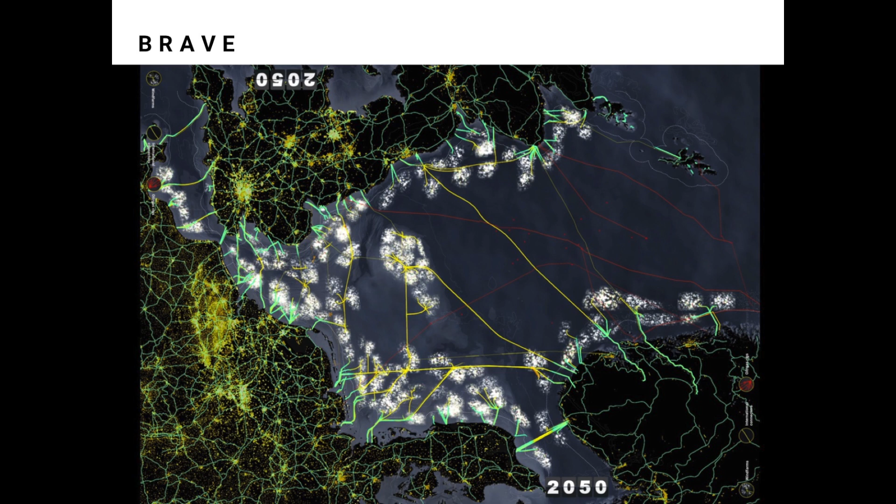The study demonstrates what such an ambitious approach involves, what infrastructure it requires, what it means to link up with the nature of the North Sea, what role the entrepreneurial state plays, which innovations this requires, and especially which new economic dynamic chances this will generate, for instance in the offshore sector.

The project aims to create a new reference point for a broad dialogue between public and private parties and a new appealing step towards realization of large-scale production, transportation and storage of renewable energy on and around the North Sea.

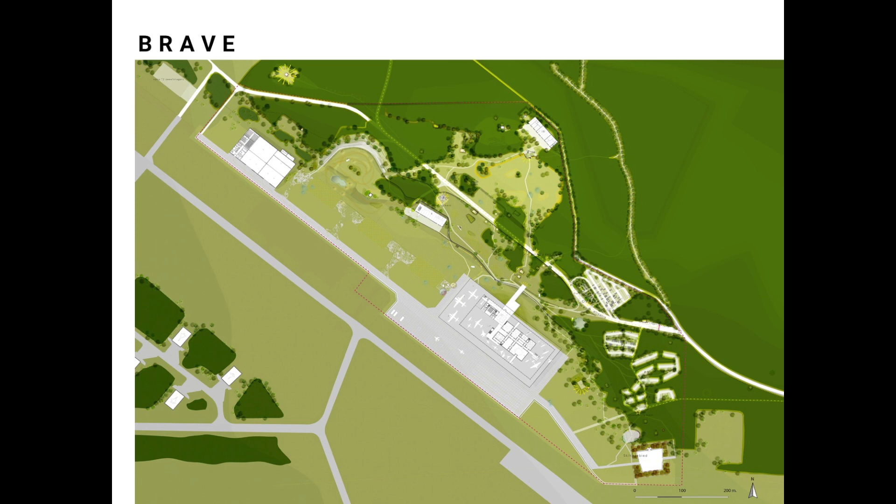This attitude of continuously asking questions, researching, doubting our own logic solution, trying to find an even better, simpler, more appropriate answer, is in our system at H+N+S. It's under our skin. It not only shows in our research activities, but also pops out in concrete design projects. Take, for example, the National Military Museum on the former military airfield of Soesterberg, for which we designed a 45-hectare outside area.

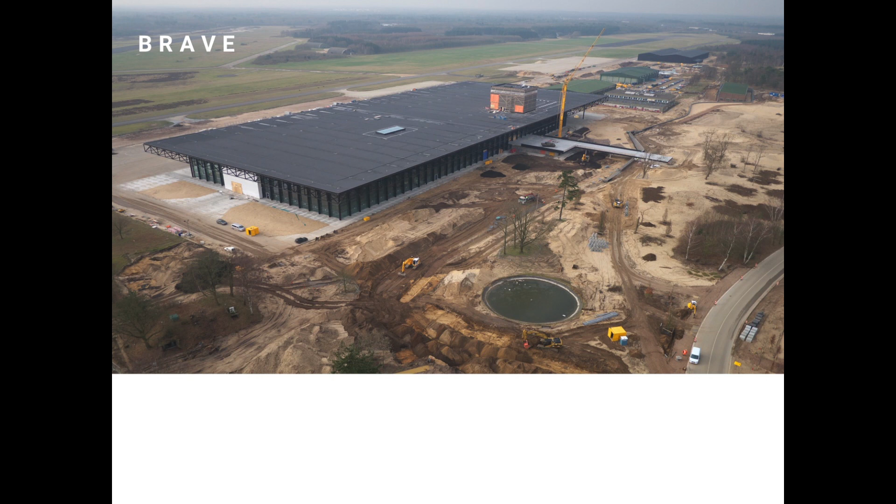In the output specifications, we were asked to build a 2-meter-high fence around the terrain for safety reasons, which makes sense with numerous guns and other military stuff inside this museum. Being situated in the heart of the former airfield, now a nature and recreation area, we strongly hesitated to propose this fence, also because it would have a huge negative impact on the experience of the new museum, a splendid building designed by architect Van Wageningen.

We as designers felt there had to be a better solution, still working as required functionally, but part of the integral design. So, stubborn as we are, or you could say unbelievably positive and naive, we asked the Commissioner if we could organize the same level of security in a different way, which in the end would have to lead to an official change in the tender output specifications.

This asked for thorough research, a wide perspective and close cooperation, an integral way of working, and yes, again, it asked a lot of time. A real integral approach always takes time, convincing everybody concerned of the extra or added value of the alternative, and it requires persistence. The best option is not always the easiest one, but it shows.

In the end, we proposed two alternatives, one on each side of the museum, fitting in the landscape and giving extra meaning to it, telling the story of this historic military landscape and the historic relation between military and the landscape. Looking from the museum inside out, there is not a visible safety measure.

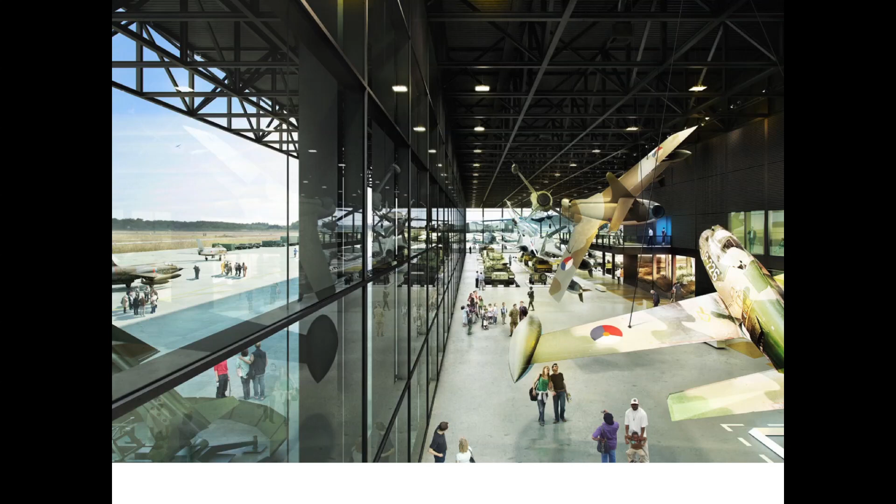On both sides, it blends into the landscape. On the side of the former airfield, we proposed a trench of a few hundred meters, referring to the military trenches we just heard about, which also fits the scale of the surrounding landscape and the scale of the building. Everything here is big. The trench actually works as a ha-ha.

We also heard something about it, a ha-ha in the tradition of the English landscape style. It is actually invisible from the museum. Sorry, I cannot show it. It's invisible, giving the visitor the impression that aircrafts and carriers can still roll to the platforms and airstrip and can take off at any moment. It adds to the magic of the place.

But on the other side of the building, the side of the entrance, we used the topography with some local differences in height—a big difference for the Netherlands, just a few meters—to prevent the necessity of a fence. We gratefully accepted the presence of this difference by concentrating it in one place. We introduced a wall of gabions, filled with reused bricks from this former airbase.

The gabions automatically lead visitors to the museum entrance. They also prevent people from leaving the path in a nature area in development, are a hiding place for birds and other small animals, and add to the story of the military museum.

Because gabions, in Dutch called schanskorven, are literally translated as baskets to hide behind. They actually originate from medieval battlefields as transportable hiding places, and are even visible inside the museum exhibitions. The museum experience, therefore, already starts outside.

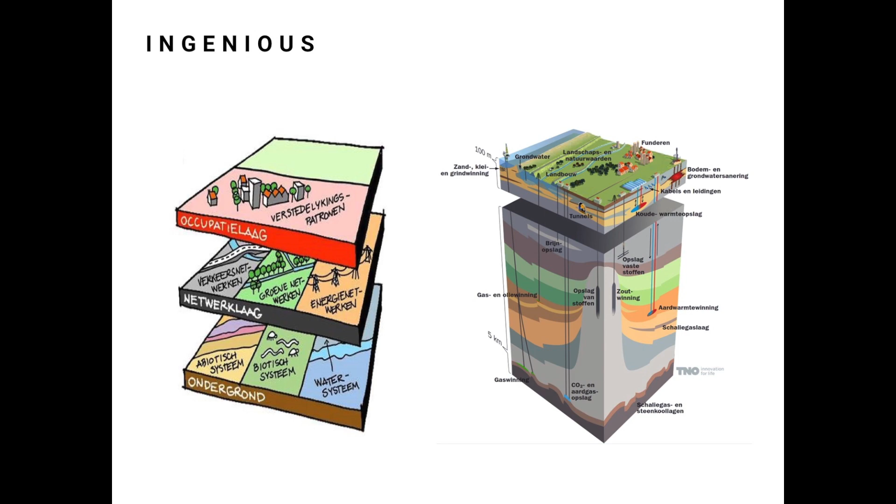We approach the landscape as a system of layers that work closely together and affect each other. To analyze and describe the landscape system, we use the so-called layer approach. The first layer forms the basis of the landscape, consisting of soil, water, and ecosystems. The second layer is the network layer: roads, waterways, energy infrastructure, for example. The third layer consists of the occupation and use of the landscape in terms of living, working, recreation, etc.

These layers interact with one another, but each layer develops within a distinct time frame. The first layer, soil, water, and ecosystem, develops very slowly, whereas the third layer, occupation, can develop and shift completely in only a few decades.

In this context, the assignments in the pre-H+N+S period helped develop the Casco concept, or framework concept, which starts with a strong landscape framework that forms the basis for the system and safeguards enduring qualities. This framework can then be filled with different, more dynamic functions that can and will develop and adjust over time.

This principle was also applied in the already mentioned Plan Stork for the first Eo Wijers competition, from which our office emerged. In this Plan Stork, firstly, the choice was made for a strong ecological network as a framework instead of pieces of nature as relics of an old historic and agrarian landscape. Secondly, Plan Stork positioned the creation of new nature as something that could be made by man, a cultural act, by introducing the right basic conditions and dynamics. The result was a new kind of robust nature shaped by natural dynamics, nature that could maintain itself.

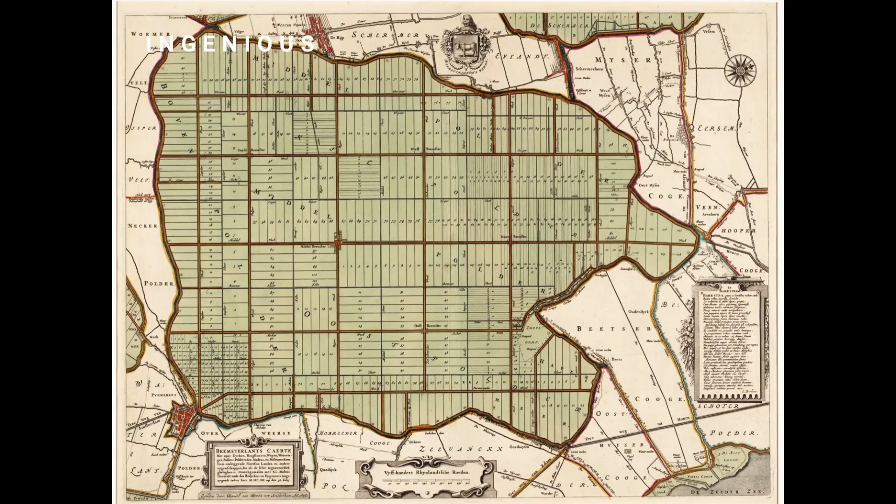In the 17th century, the Dutch Golden Age, the concept for the layout and design of the Beemster polder was based on the soil, hydrology, and the technical knowledge of civil engineering at that time. It was also a reaction to the danger of nature, with a huge uncontrollable water body in the center of Holland and the Randstad area, called the water wolf, really threatening the cities in Holland. The Beemster, therefore, is a symbol for the submission, the subordination of nature by man.

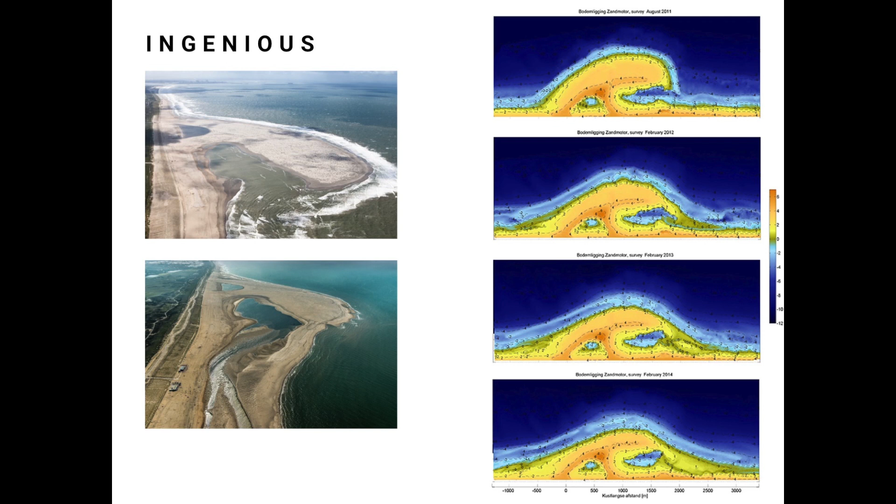And the design also reflects that total control. But times have changed since then. We now see nature as our friend, using natural forces. This is best seen in the project of the Zandmotor, or sand engine, for which H+N+S fed the original idea, using the power of sea and wind to distribute the suppletion sand along the Dutch coastline to exactly the places where it's needed most.

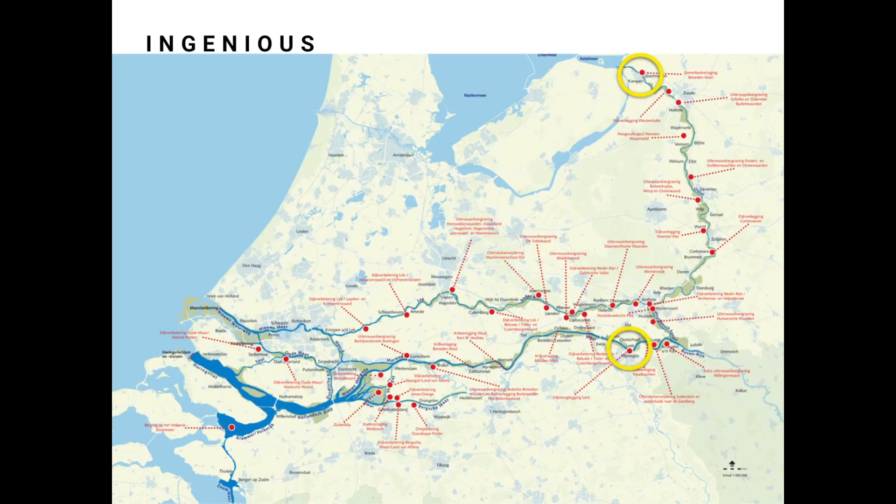This is also the case for the H+N+S plans for the Room for the River projects of Nijmegen and Kampen, indicated here on the slide, using the dynamics of the river system in this case, combining it with new demands and at the same time incorporating ecological and cultural values.

Room for the River is a national project that started over a decade ago. It deals with improving safety and preventing flooding, together with improving environmental quality, a so-called double target. Ecological quality, landscape use possibilities, and economic significance will benefit not only in rural areas but also in a number of cities along the rivers like Kampen and Nijmegen.

We are involved from the initial ideas through to completion of designing new river landscapes in this Room for the River program, for example in the river park of Nijmegen recently finished and Kampen, now under construction.

The Dutch Delta, as you can see here, is part of the major catchment basin of the Rhine River. Rainwater and melting water from the Alps and Germany pass through our country on their way to the sea, and a substantial part of the Netherlands lies below sea level and river levels. This means we have to consider the constant threat of flooding, with danger coming from the sea with rising sea levels and from the big rivers with heavy rainfalls occurring more often.

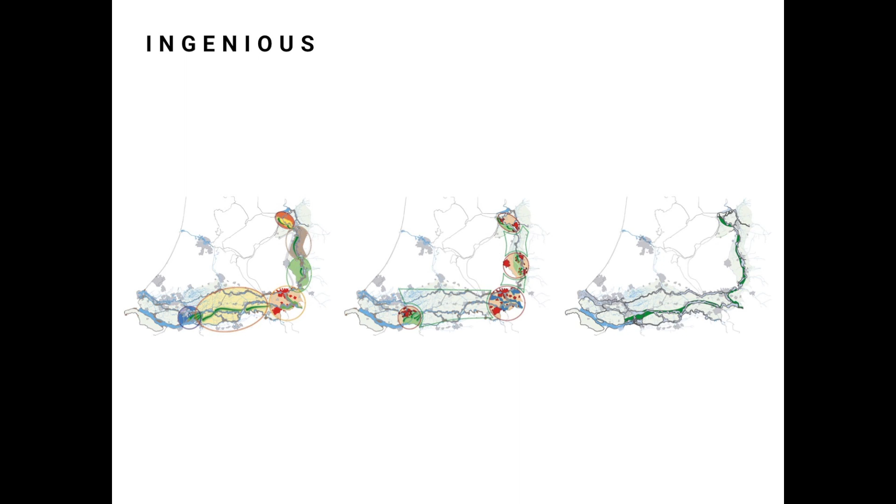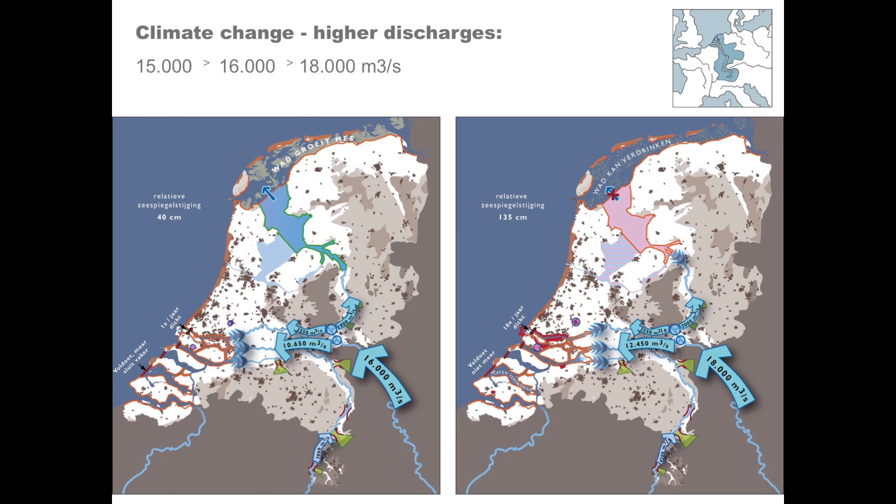But as our climate changes, more water will flow through our rivers, coming from Germany and Central Europe. That will lead to higher water levels that will also occur more frequently. In the meantime, economic development and population will continue to grow. The likelihood of flooding will increase, as will the effect of floods.

During the 90s, a number of extremely high water levels occurred in the Netherlands in quick succession. Although no dikes actually burst or flooded, the situation was critical in multiple places and major evacuation procedures were set in motion as a precaution.

In the years that followed, huge efforts were made to strengthen many of the dikes. Before the program of Room for the River, raising dikes was the common approach of the Dutch to counter the threat of water. But this is not easy to realize anymore in an intensely used Dutch landscape, with often buildings located on the dikes and limited space in the immediate surroundings to raise the height of the dikes.

Relocating the dikes closer to the river, where there usually is some space, often will only increase the water levels, and this makes the problem only worse.

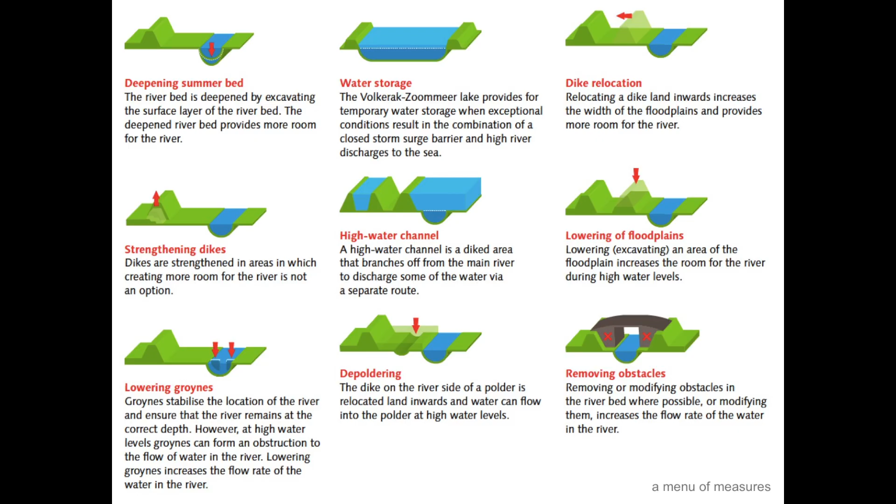So the need was felt for an alternative strategy to ensure the security of the region of the major rivers, a strategy in which high water levels were not taken as a given, but were prevented by providing more room for the river, a strategy in which spatial quality was a second equally important aim.

This marked a turning point in the centuries-old development of the rivers, which has seen the area they occupy gradually reduced. Instead of less room, there is now more space, more room for the river.

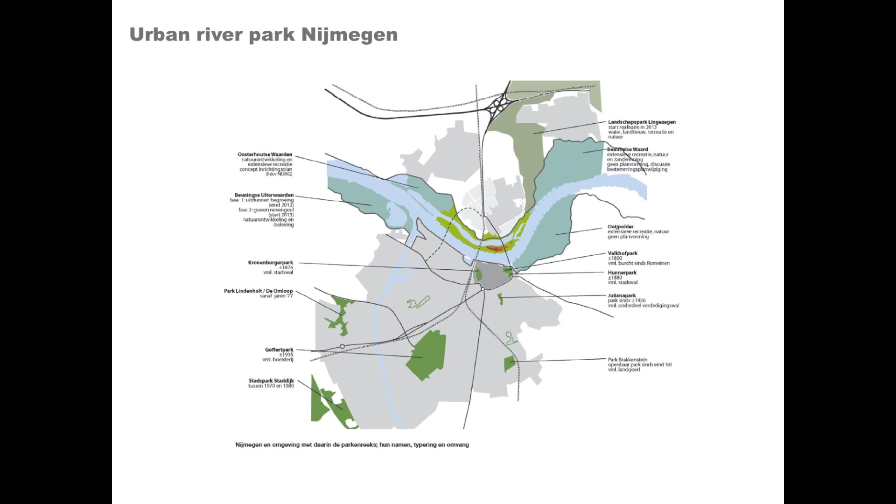In the case of Nijmegen, a hydrological bottleneck has been solved, realizing a bypass, a completely new piece of river. A mirrored river, creating an urban park for the expanding city of Nijmegen on the other side of the river Waal at the same time.

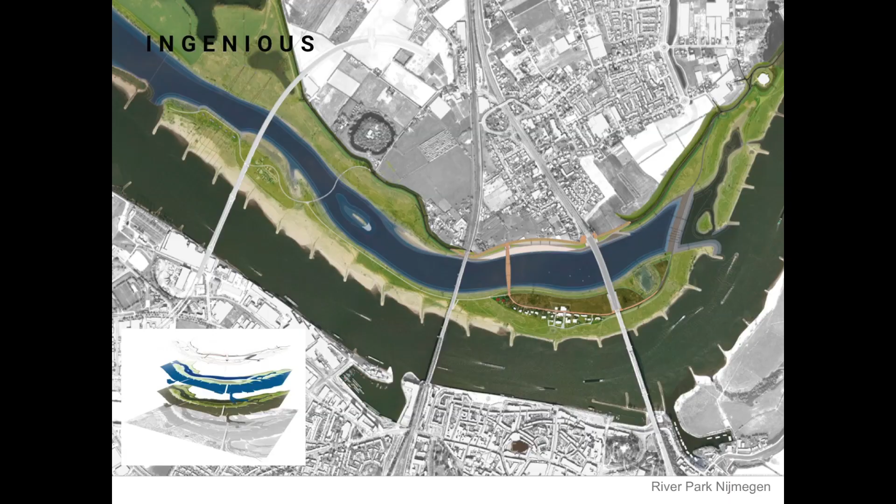Pictures of the old situation compared with the new, I think, tell the whole story.

In the Room for the River project we carry out, like Nijmegen, creating conditions is the central theme. The role of the landscape architect focuses on creating conditions in which the landscape can develop and grow. Responding to natural processes is therefore more important than creating fixed forms.

However, this does not mean that nature merely follows its own course. If the right conditions are created, nature can also be created. The emphasis on natural development in the Room for the River program testifies to this.

Accordingly, landscape design is always layered and is the result of interaction between various interventions and processes over time, only partly predictable. This approach calls for a special type of design in which the hard engineering as well as the development of landscape with its vegetation and morphology change over time.

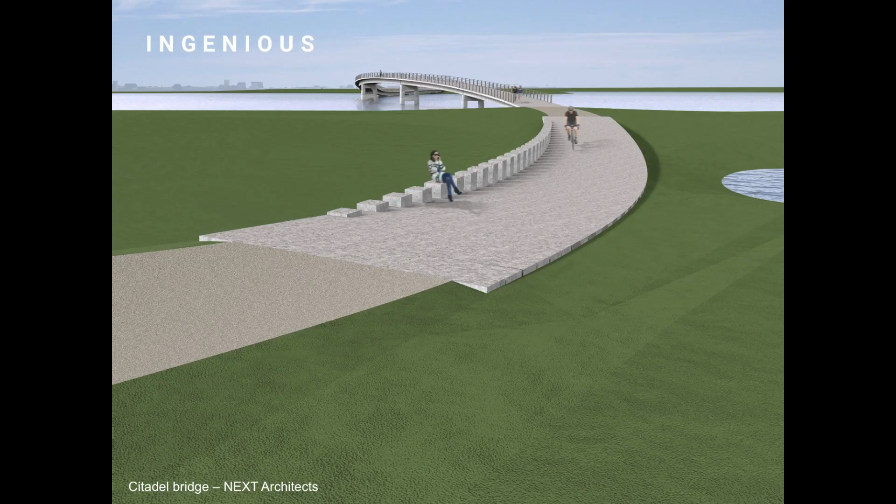In some cases, the river dynamics also even color the architectural design. In the case of the Citadel Bridge, for example, designed together with NEXT Architects, the river dynamics lead to a special design that changes with the water levels of the river in the changing seasons.

The urban river park in Nijmegen is certainly not finished after the contractor has gone. In fact, it has only begun. The vegetation just begins to grow and the water begins to shape the land and its habitat. It's not a design, it's a process.

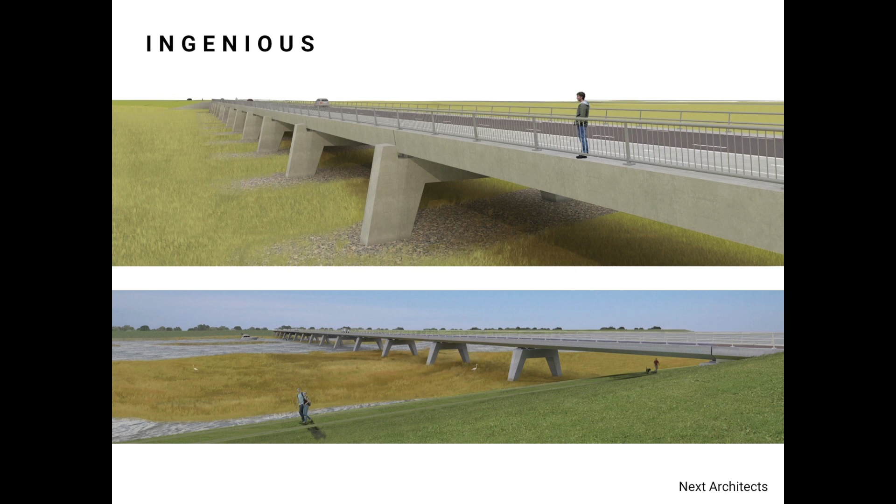The quality of the design more or less automatically arises from the logic of the landscape layers and the way they are used and changed by man. H+N+S in this process always looks for synergy, for smart combinations to make a plan more interesting, valuable or realistic. The quest in each plan for added value, extra value, doing more than what it is supposed to do, could be regarded as the typical H+N+S trademark.

You don't recognize our plans in terms of a typical H+N+S design language, with recurring shapes or forms. It is a way of working and attitude. To make it very concrete, it means first things first. First, from understanding the system, create the right conditions in the landscape system. Fit and then fit in the program before giving it a form. It's the crucial difference between to design and to shape or to form.

This, of course, doesn't mean that shape and form are not important. Of course they are, they surely are, as in the case of the bypass of Kampen, for example. The landscape architect and landscape architectural design play a central role, not only at the scale of the river system as a whole, but also in the detailing of small-scale elements, relatively small-scale elements.

Together with the architect we work with, in this case, again, Next Architects, that's what people see and experience in the end. But it doesn't start there, it's what naturally comes out of it. We often try to make a design that in the end is so logical that nobody recognizes it anymore as a design, as if the situation has long been there.

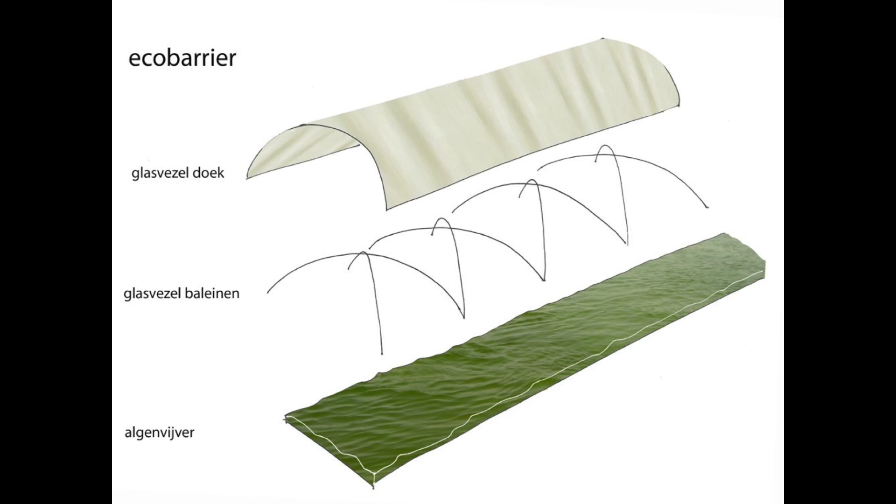About a year later, in January 2009, Schiphol Amsterdam Airport announced the winner. The winning design, a Dutch entry, was selected from a total of 97 entries from 17 countries. It was the Eco Barrier, submitted by Twan van Beuten, a local town planner who designed the Eco Barrier in his spare time.

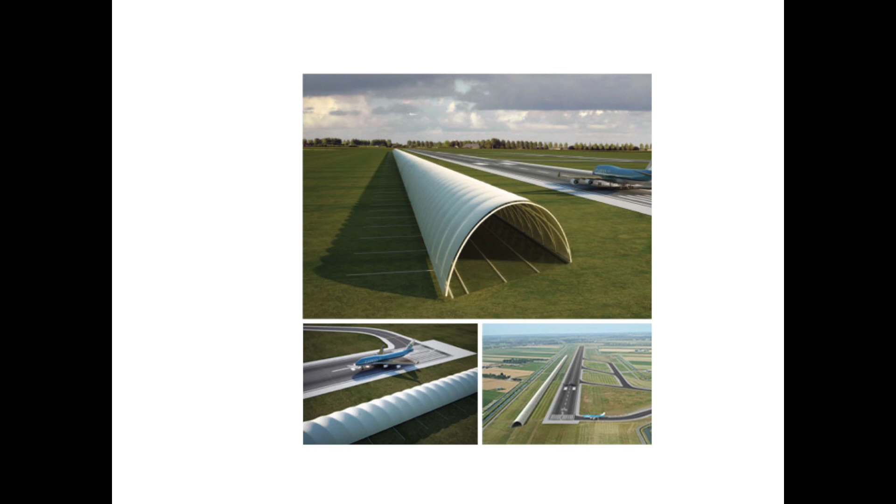He proposed a structure to be erected along the runway that would look like a huge tent, with an estimated reduction of around 9 decibels. The Eco Barrier consists of a glass fiber construction with a length of almost 2 kilometers and a height of approximately 14 meters. To achieve maximum effect, the sound barrier would have to be installed as close as possible to the source of the noise, the aircraft on the runway.

During landing, the facility is not needed and for safety reasons should be folded down. This will also be the case with strong winds, when the ground noise will fade away. The idea was also to collect Schiphol's sewage water in the tent and use it to feed a basin of algae that can be used for energy production as biofuel, providing enough capacity for some 600 households.

So far the good news. In 2010, one year after the competition, Schiphol abandoned the idea of the Eco Barrier, mainly for safety reasons. The idea was too complex and met too much opposition, leaving Schiphol with a huge problem.

But salvation was on the way. Residents noticed that the noise was reduced when farmlands were plowed. This was because the low frequency sound waves are being dispersed by the plowed land. This was the starting point for research into a noise-reducing landscape using artificial embankments.

From this moment on, H+N+S was involved with designing this noise-reducing landscape called Park Buitenschot, situated on the edge of the city of Hoofddorp, between the runway and the houses.

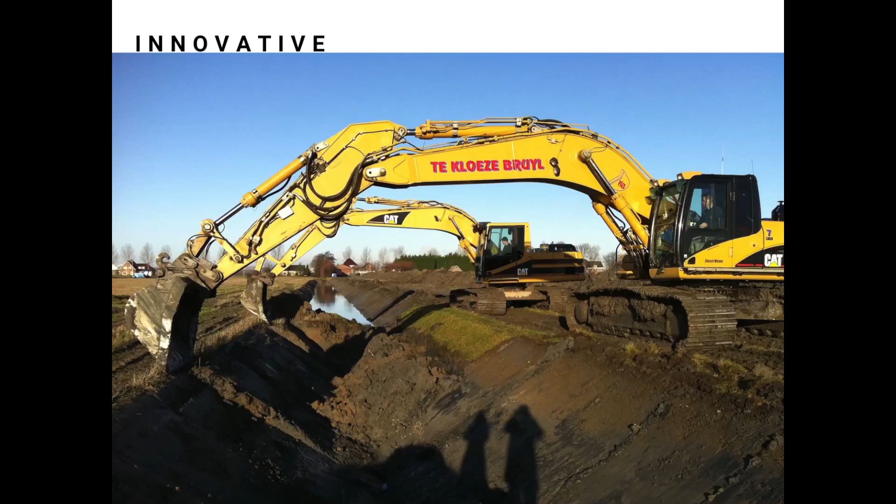This had never been done before. There were no examples, so we had to do a lot of experimenting, modeling, and one-on-one testing. The design of the noise reduction park took a few stages.

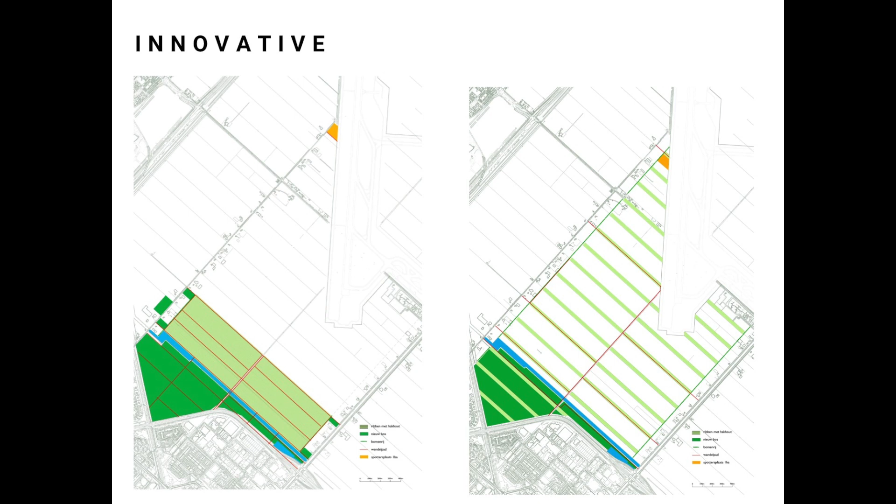Our first models were anchored in the pattern of the polder, the Haarlemmermeer. We drew a clustered alternative and a dispersed alternative. The dispersed one proved more effective, but both modeling and testing showed that this dispersed alternative alone could not produce the necessary 10 decibel noise reduction.

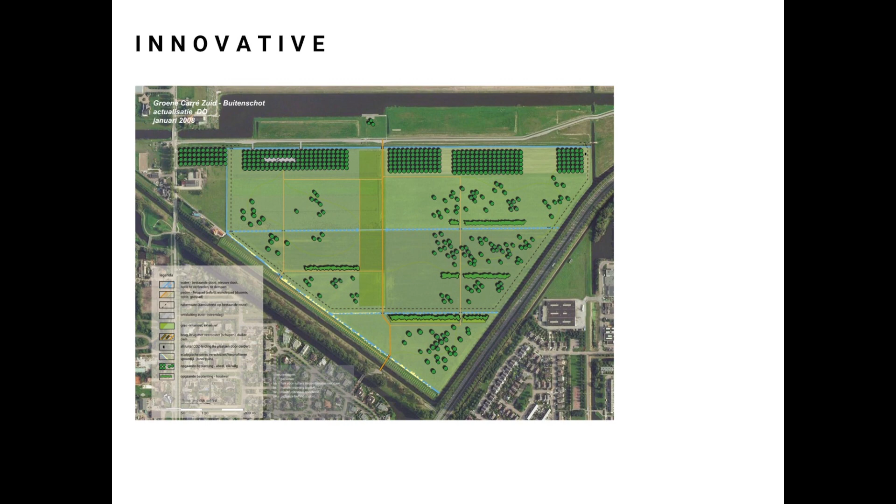So a complementary effort was needed on the location of Buitenschot, a planned park for Hoofddorp, the green area you see on the left corner. There already was a design for this park, actually quite a nondescript green area, mainly for people to walk with dogs. The land artist Paul de Kort set us free to think about and design different patterns and get loose from this rigid polder structure.

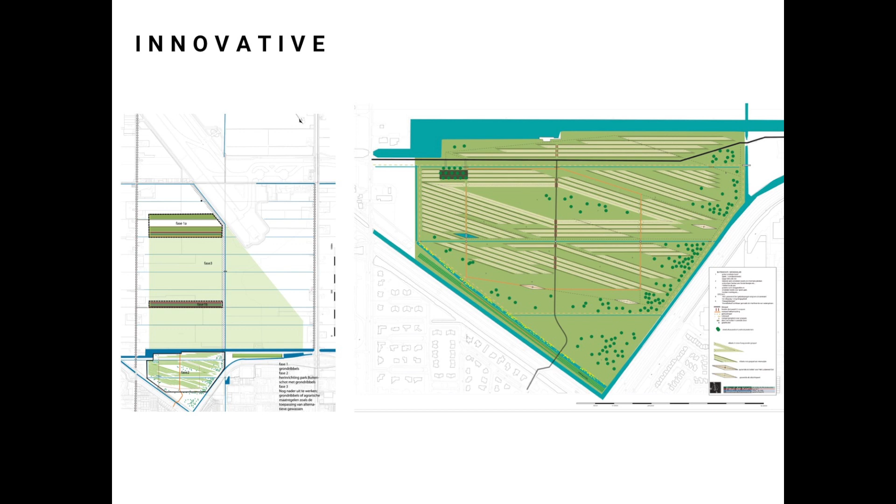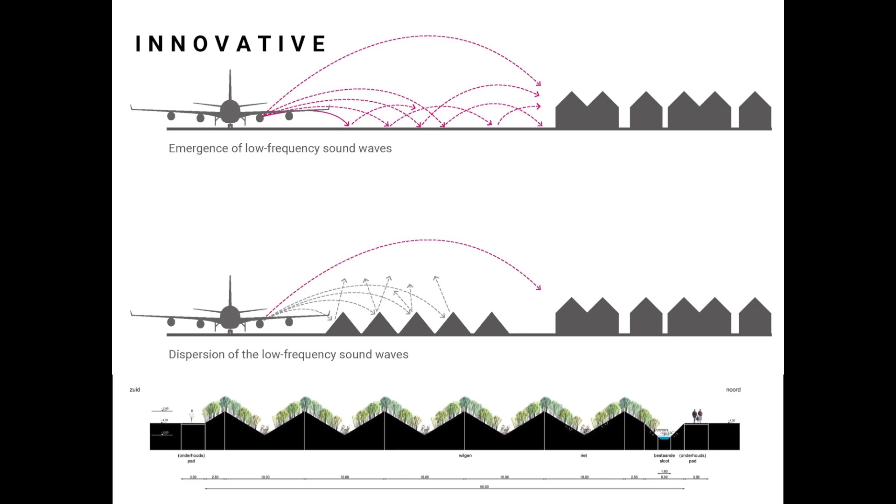The combination of the two programs, recreation and noise reduction, led to a public maze, the noise labyrinth. The basic park element consists of 3-meter high embankments that are 1.10 meters below the land surface and distribute the noise, forming a rib pattern. The 1 meter broad path between the ridges also serves as an informal walking path.

The park consists of a number of different spaces between the embankments. The heart of the park is formed by a 500 meter long and 100 meters wide open space, as you can see here. This offers ample space to be used as a playing field and during cultural events. In addition to the large space, there are also a great number of smaller enclosed areas scattered between the ribs.

To the north and south, the grassy ridge structure thins out until it dissolves into longitudinal pyramids distributed along the edges. Measurements and calculations have shown that the ground noise is distorted and dispersed by these oblique planes. It proved to be very effective, even more effective than predicted by the experts in their calculations. And with some poetic license, one could even say that the invisible ground noise is made visible by the ground ridges.

To conclude, where does all this lead us to? For an office to be brave, ingenious and innovative is no longer enough these days. The actual situation asks that designers find smart coalitions, organize themselves and position themselves right in the heart of the topic. Behind actual themes like coastal or river safety and energy transition, a complex reality is hidden, where various technical disciplines contribute and have an important share in solving these complex matters.

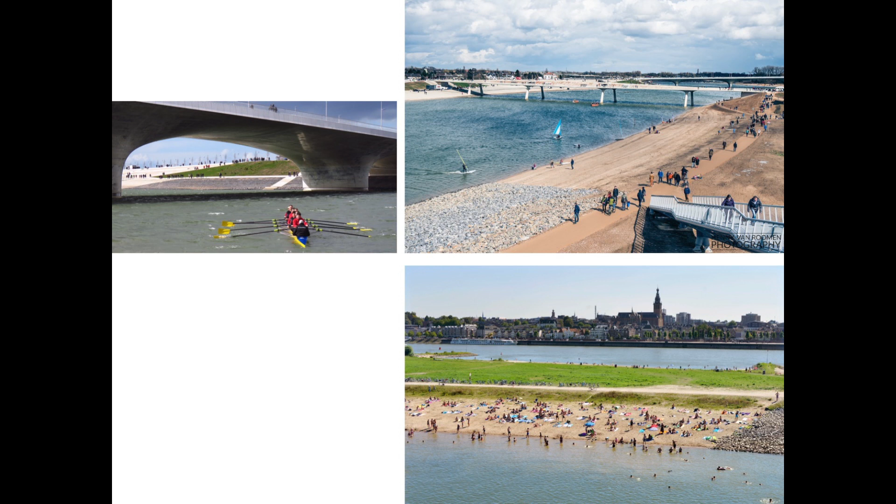Design is not considered the result of the process itself, but as a way of guiding the process, searching for new ideas and unexpected partners to accept, searching for relations between topics and skills, and asking new research for the next step.

The Room for the River projects in Kampen and Nijmegen are big interventions in the existing urban environment. And the open design process enabled people to grow accustomed to the ideas and to see the benefits of it. And they did, as you can see.

Finally, all this may very well sound like a smooth public relations backdrop. And that is completely against our nature, and I apologize for it. We actually hate to go around boasting about our project and make an exception on today's occasion, because the organization asked us to speak about our own work.

We might be brave, we might be ingenious and innovative, and we try to be smart and persistent too, but most of all, we are humble.

From tomorrow on, we gladly step back into anonymity and focus on the work to be done. There's a huge task waiting for us. As a matter of fact, there are huge tasks waiting for all of us. We're facing big transition assignments, moving towards a society based on a sustainable water, energy and production system.